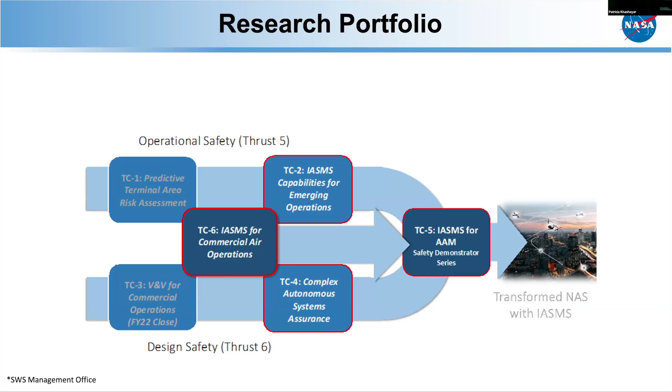TC6 is the commercial operation, but all this work is now going into IASMS. Everyone over the past 4 or 5 years has worked on each of these parts, and the final one is IASMS. AAM stands for Advanced Air Mobility, and that's where everyone is transforming into, the future NAS work.

As a project, there are a few things we look into: improving efficiency of the flight, how you access the vehicle itself or the airspace, how you expand the services, and exploring, discovering and understanding the impact of safety, because safety is the biggest concern since we have humans on board. Anything connected to safety, the vehicle itself or wherever they are in the airspace, whether flying in the NAS or when it touches down.

Develop and demonstrate the solutions, that's what we've been doing. We first started with initial work testing on our own vehicles, but now we're demonstrating it on other vehicles too, which will be part of the NAS. These vehicles, when they fly, are actually flying in a national airspace. Even though they're confined to a very specific airspace, they do have communication with the ATC at some point, so the ATC knows there's a vehicle flying.

So how do you communicate that information to the vehicle, and then identify and proactively mitigate risks, because there are always certain risks which are going to be happening. It may be something related to the weather, the airspace itself, or the vehicle itself, and those are the different risks which may be happening during the operation. So how do you mitigate those, and look into the different target safety levels for that. Our work, especially in the group, is more on the vehicle safety part, wherein we look at each aspect of the vehicle health, and that's what I'll preliminary focus on. But it's not limited to vehicle safety itself, there is a lot of other areas too.

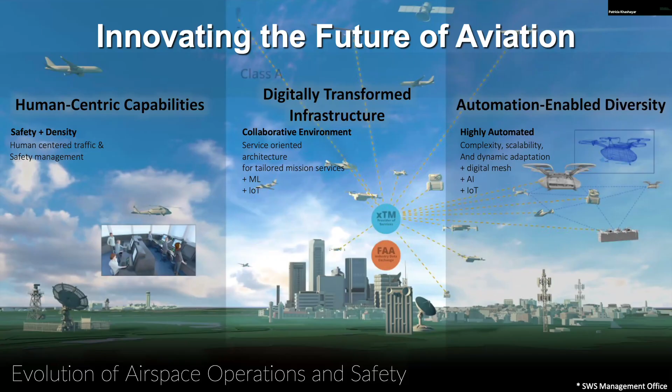The idea is to move towards that direction and minimize the human load as possible, wherever it can be done. And as I mentioned, when we talk about these type of vehicles, it's not just one participant who is there. Probably when we talk about currently in our case, this is general aviation, the single turbocharged aircraft what we have. These are the commercial aircraft. So this is what exactly we would be looking into.

In our case, these are regional air mobility, so we will be somewhere in this area where we are in lower altitude and urban passengers. This is where the advanced air mobility type, the eVTOL type of vehicles would be. But it's not limited to that. We would have some regional jets coming in. There will be higher supersonic and high altitude areas also, which are part of the national airspace. So it's a combined complex effort.

It's not just one specific entity. If I say, oh, I'm just traveling from point A to point B, and I don't care what's happening everywhere else, that's not how it works, we cannot be isolated type of operation. It has to be integrated with some kind of thing, because at some point of time you may have a launch system, so probably you may have to clear out space. There could be a high impact. There are some cases where airspace is blocked out because a specific passenger, president, or high dignitaries are traveling, then they block out the airspace itself. So if something is blocked out here, probably you may have to reroute your vehicle, but then can you reroute at that lower altitude? Those are some of the decisions you have to take during that operational period.

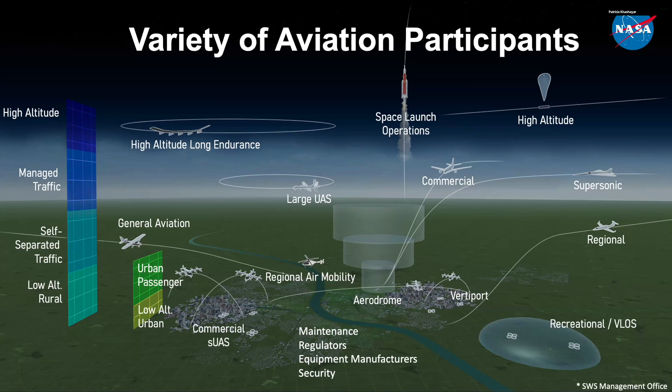So how do you try to look at the eVTOL or the commercial SUAS type of space, which can be automated in some time? What are we trying to look into? More operations, the more operations we have, the more risk we have. Whenever there is a new mission which comes in, that brings in a lot of complexities, because any new thing which has to be integrated will have complexities for the system itself. And how can you sustain under different constraints the way we are going into transforming, like probably electric mobility, which is coming along.

Which is coming along. So how can you make sure that those kinds of electric vehicles are also part of the system, or integrated in the system? And the three things we are looking into are digital transformation, how to change existing systems and integrate them; and AAM, which is how do you certify them? Because these new vehicles are there, but if there are new technologies coming into the system, how do you certify them? So that's a very important thing.

And how do you do automation and autonomy? So you have to automate it, but then how much percentage of that can be autonomous, and how much percentage can be human in the loop? So there are pros and cons to that. So how do you control that part? So we looked at how the system behaves, but then there are a lot of complexities and risks involved in that. And the risks basically depend on different areas.

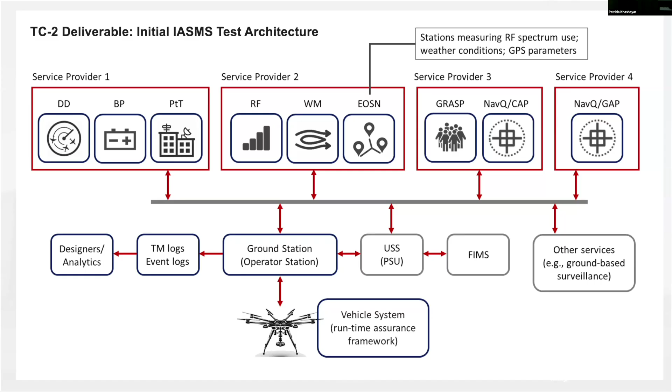So everyone provides different information, but everything is gathered together to give you a specific output for how the total health as well as the system health is going to behave in the future. That's what we try to look into. And these are like software sockets. You develop your own algorithm and connect it to the bus, and the information flows. Once it flows, it is provided to everyone, and you can take whatever information you require for your decision making and take that decision. At the lower end, you can have several operators, not just one vehicle, but multiple vehicles.

I did talk about when you have to take a decision. In the prognostics case, whenever I get to know that something is going to fail in probably 1 hour, human intervention is a good way to do it, because humans can think about it and take a decision. But if something is going to fail at a millisecond or second level or a couple of minutes, human intervention would not be appropriate. In that case, autonomy would be a better way to take over.

But in the case of a couple of minutes to a couple of hours, it could be pilots and air traffic control. And anything beyond that is probably maintenance. So if I think my motors are not behaving properly, or my battery needs to be changed over a period of time, that is a maintenance thing, but my prognostic horizon can give that estimate to me.

So I know that when I'm flying my vehicle, that yes, I know there is something — the battery pack is probably aging or degrading, but I cannot change them right now. I can change them probably in the next 10 flights or in the next 5 flights. So that is the kind of information our algorithms give to the operators, and then they can take decisions based

on that information. So whether it's maintenance or whether it's taking a decision to change the route, which would happen closely, within minutes or 20 minutes. But anything beyond that is called maintenance or predictive maintenance. That's what we call it. So we combine both of this information together, and depending on that, the operator can take the decisions on what has to be done.

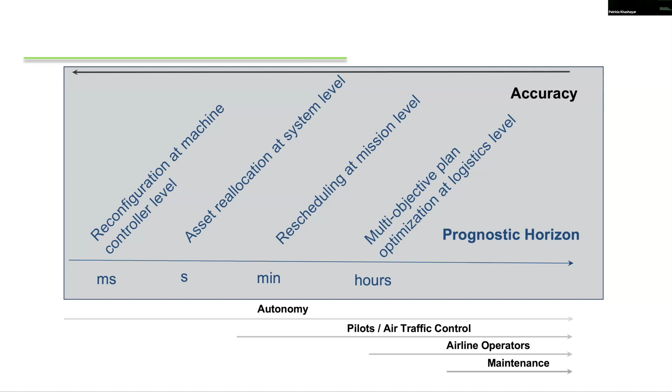I'll go into the basic framework of how these operate. I thought I'd take a story and then go in depth so that you have a good background of what work we are doing and how it integrates with the actual system. So I went the other way around. So this is going in depth now, into how the algorithms operate.

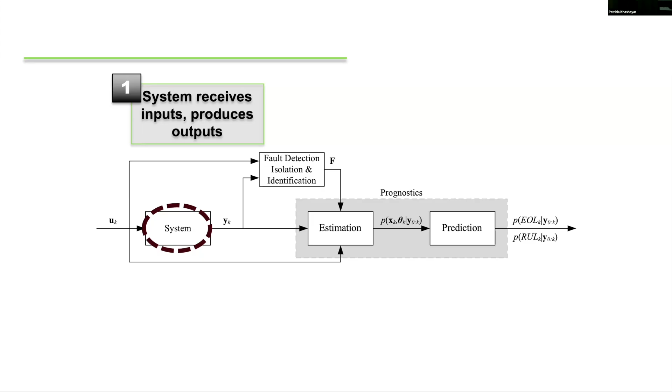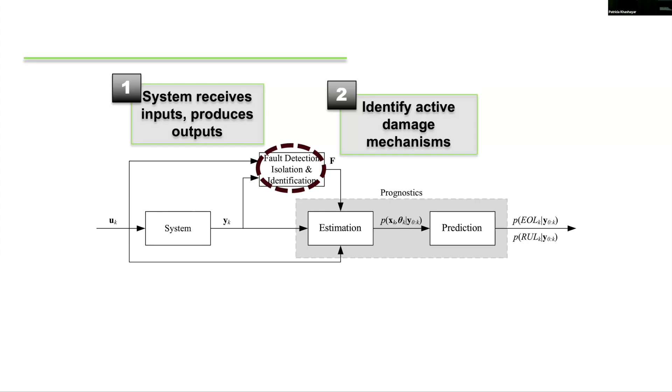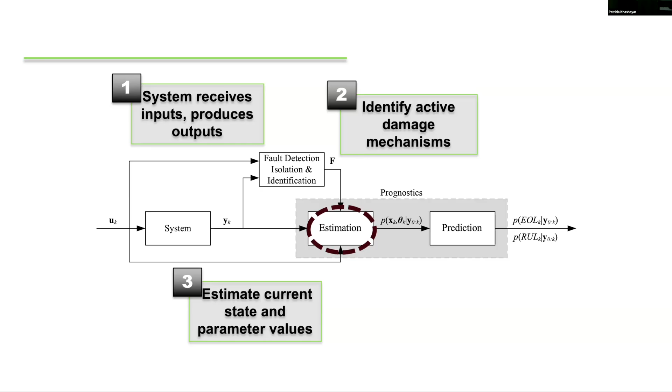Basically, you have a system which receives an input. It could be any system. Once your system deviates from its actual operation, you identify the active damage progression or what damage mechanisms are there. Once it's detected that there's a problem, then we try to estimate the current state and the parameters. So it's basically state estimation: okay, there's a fault, but what's the fault magnitude? What type of fault is it? So we try to detect that. That's fault detection. And then based on that, we try to make a prediction.

So it's very similar to when you go to a doctor. I have a cough, so probably the doctor will diagnose why the cough came. Did you eat something specific, or did you have a cold or anything else? And then the prognosis is, okay, take this medicine, you will get better in 3 days, 5 days.

So systems are exactly that way: you have inputs, something deviates, you try to detect that, and that's the diagnosis part. And then you try to estimate, okay, do I need to take one tablet, or half a tablet, a quarter tablet, whatever that is. You estimate the magnitude, and then you predict that your system will fail in probably 2 hours or 5 hours or 10 hours, whatever that timeline is. So this is the whole process. The whole framework is based on this architecture, and we have been working on this and improving as we go forward.

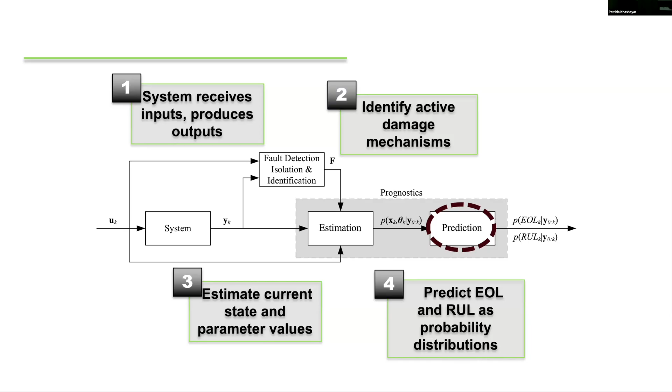And when we have to know about the system, the best way is always to go to first principles, and that's what the group has been looking into. There is a lot of work done on data-driven methods and on machine learning, and we are catching up with that part, where we are trying to combine machine learning approaches, and I'll talk about that. But the underlying thing we are looking into is the underlying physics of those systems and subsystems, and modeling those. So we try to model the damage progression, what's happening.

So if something is breaking, if you take a motor, the motor has windings, it has rotors. So what is the problem? Where is the problem? You look into the damage propagation mechanisms and determine the threshold. Each system is different, so they will have different threshold values. If I take a battery, probably the state of charge determines the threshold. If I take a motor, probably the internal resistance or winding resistance determines the threshold, or probably the RPM speed. We can set those kinds of things. So everyone has different threshold values.

And once you determine those thresholds, then you develop algorithms which will propagate them forward. Because my system is moving forward, I know what my current state of health is, but now what I have to do is use that model, estimate my current health state, and predict what's going to happen in the next 1 hour, or in the next 15 days. So that is where the model comes into the picture.

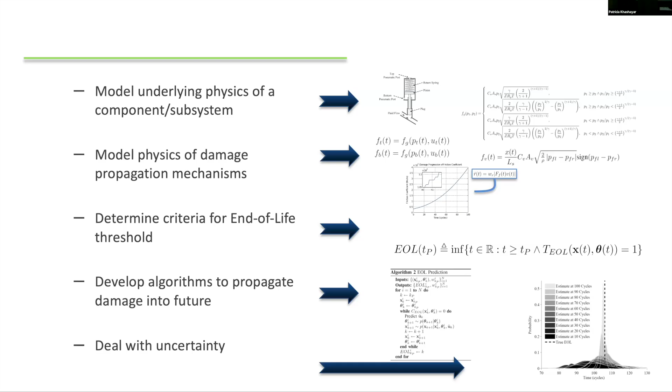But if a model is good and if I say, okay, 2 hours plus or minus 5 minutes, yes, that's better information because then I have confidence that whatever estimates I'm giving in the future are good enough. So that all depends on how good your model is. It can be anything. It can be a first principles model, can be a differential model, depending on what you develop around it.

So as I was talking, we looked into the physics part of the model. For a long time we looked into the physics parts, developing differential equations. So we looked into models for batteries. We looked into how rotors are behaving or what the wind thrusts are. We looked into a lot of structural modeling. So we do a lot of SHM, structural health monitoring.

So some of the work we have done is on composites, wherein we can determine what the fatigue crack growth is. So everyone must be aware of the Paris growth model. Like, okay, you have a crack, but now based on that crack, how will it propagate forward? And then can I determine when it's going to fail? So that's used for bridges, steel, metals. But then we tried to work on composites. So that was some of the work we have done.

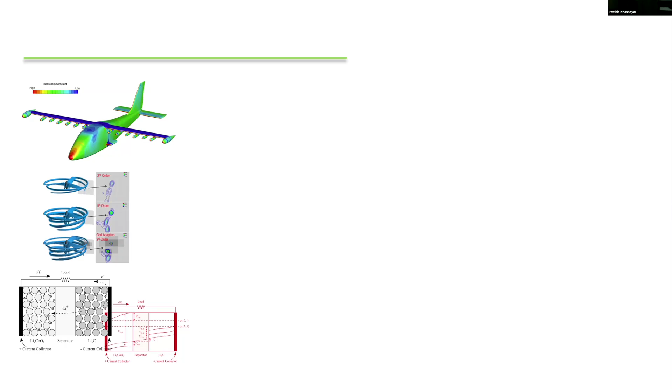But now the other side of it is there is a lot of work done on machine learning. So you have a lot of data available because IoT is coming up and you just keep on collecting data, so you can develop a lot of machine learning models. But at times, the data you get is always constrained to a very nominal operation because failure operations are very rare.

So if you operate the system for like 10,000 hours, probably you may get not even half an hour of failure data out of it because most of the time it's operating normally. Only some abnormalities are captured, and that is difficult. So you need to have very good data if you want to build good models, especially for complex systems.

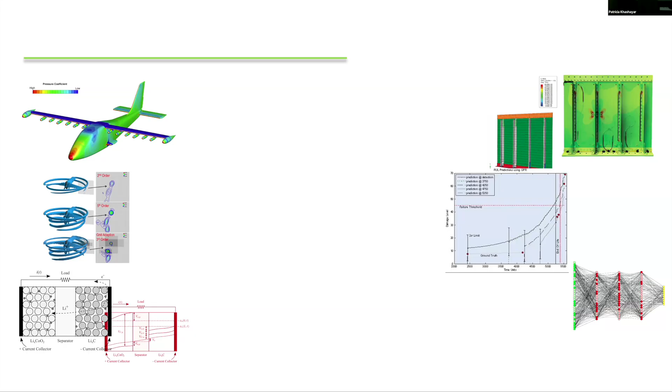So what we came up with was a method where we could combine the two of them. So we combined the physics part and the data-driven part, and we came up with this new methodology, which is very much coming up now, called the physics-informed neural net. So it's basically trying to learn some of the parameters, keeping your physics model consistent, but using the data to update your models. And you try to check what the degradation models were.

So in the previous slide, we looked at how to learn the degradation models or specify what the degradation models are. So we try to use this physics-informed neural net approach wherein we could combine the two together. And there is PyTorch, there is TensorFlow, these new Python packages available. So this is new work we developed wherein we combine the two and apply it to a few examples. So I'll just talk about those.

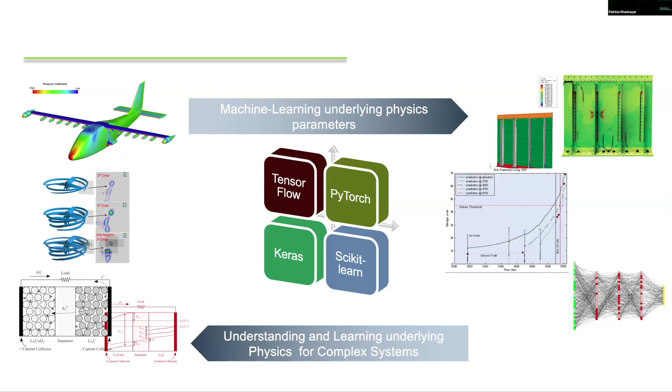So this was the earlier part, and I'll just go a step into diagnostics, how we do it. So for the diagnostics part, which we talked about in the architecture, what we did was we looked into the FMEA part. FMEA is basically looking into the root cause analysis. That root cause analysis was applied to a UAV type of vehicle again, because that's some of the work we have been doing. But then everyone has their own root cause, right? If you have an avionics system, that would have failed differently.

The structures may fail differently, the actuators may fail differently, and the powertrain itself may fail in a different way. So we looked at all those different root causes and how that would affect the vehicles, because these are all part of the vehicle. So each one has a different root cause, and we looked into that.

We implemented a Bayesian architecture. So Bayesian architecture is basically probabilistic detection, wherein we are able to detect a fault in the system. So the root causes are the top lines. The root causes are basically the operational conditions, but the lower ones, what you see, the TB, IB, those are temperature, the current, voltages on each one of the systems. So this was for a power system, and we used one arm of the UAV, and we were trying to look into that.

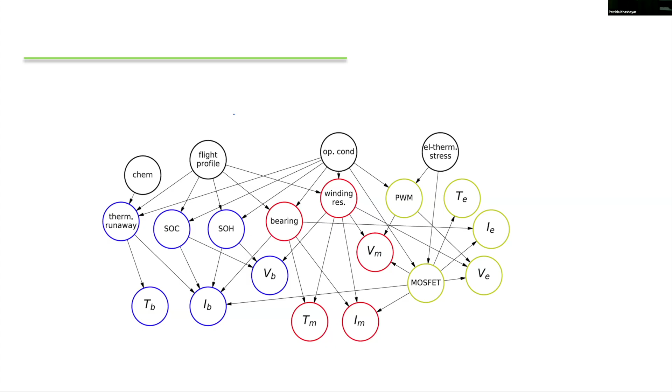The blue ones are all battery faults. So in a power system, you have battery, you have the speed controllers, and the motor. So these are the three key components. So we looked at each subsystem, and then based on what we observed on the sensors, we were trying to do a Bayesian analysis and then say, okay, which fault it is? Is it a fault in a battery? Is it a fault in the motor, or is it a fault in one of the speed controllers?

So we just did a basic study, or at least an example, wherein we're trying to compute what are the conditional probabilities. So if VB, voltage from the battery, voltage from the speed controller, and voltage from the motor is high, that means there is a fault on all three of that. So the underlying Bayesian framework is able to detect that, okay, yes, there could be a fault in either one of these. So then it ranks it based on what is maybe the highest probable cause.

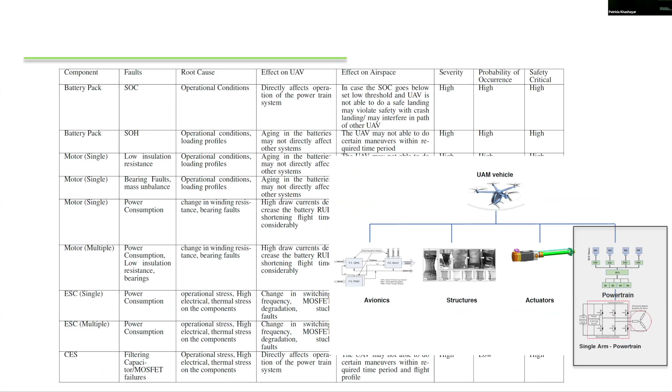And how is that done? So the probability distributions are based on the FMEA model, what we looked at. So we define the probability of causes based on the distribution, based on what will be the cause of these faults, and then applied that distribution to the whole network. And then based on that, it's able to rank it and then say, okay, yes, you see the fault in all three sensors, but the actual fault is the battery fault. That's the reason SOC has the highest probability, so that's the one at the top. That's because the state of charge of the battery is going low, because you are operating the battery, and that's the reason you see the voltage going down.

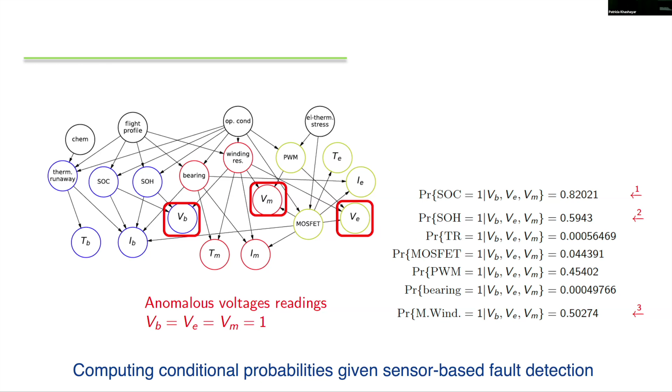So once you detect that fault, now you know that, okay, this is the fault. And then you apply the prognostics to it: I know that the SOC is decreasing. Now how much time do I have before this SOC reaches the specific threshold? So then the prognostic step starts. You detect the fault, and then you have prognostics, wherein you try to estimate, now I know that the state of charge is the one which is changing, how much time do I have before it reaches the threshold down the line?

And here we use the physics informed neural net framework, what we talked about. So we have the system input. This is the same architecture we showed earlier, but now we have a physics informed recurrent neural net, which has both the system model, the physics model, as well as a data-driven model. And then that is updating at each step. And at the lower point, this is the differential equation. This is the purely differential equation model, called the electrochemistry model for the battery, which we developed in the lab with a few of my colleagues a couple of years back.

But the unknown parameters in this case are the internal resistance of the battery and the capacity of the battery. So those are the two parameters which keep on changing over the period of time. So the model in our case looks at the input current. What is my input current? And then based on the whole model, it's able to estimate what these R and Q max values are over the period of time, and then those will change. So the rest of the model is a purely physics model, but only these two parameters are learned using a multi-layer architecture of the neural net. So the neural net only learns these two parameters which keep on changing.

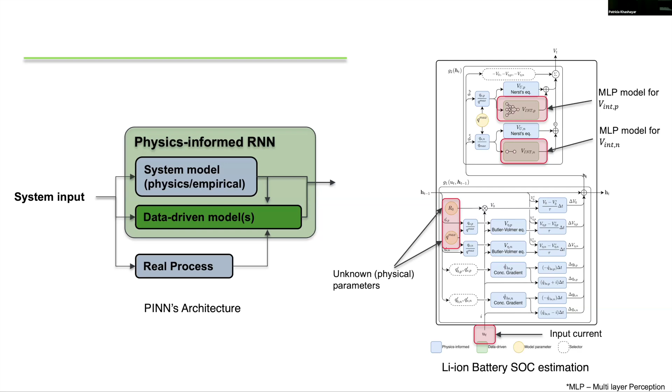And we demonstrate that through some of the work we did in the lab.

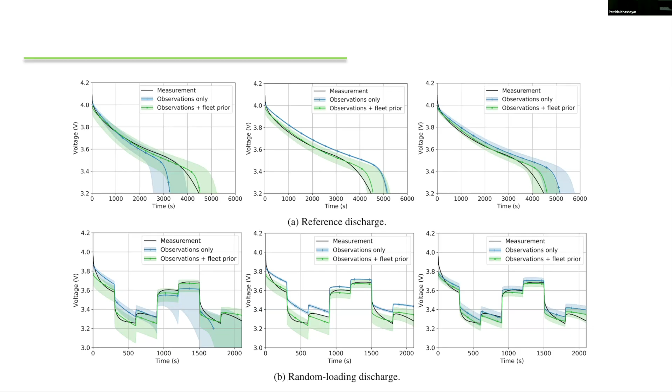And we have demonstrated this on small vehicles a lot. We almost did 100 flights, demonstrated that both on fixed wing vehicles and rotorcraft. And the work continues, we are still working on it and improving our algorithms.

But looking ahead, what we're trying to do is not just apply it to a single vehicle. So I showed an example for the batteries because that's my core area of work, what I've been doing. But I've also been working on other areas, like the powertrain of the system, and how can you apply that to weather?

Can you predict the weather well in advance? Because these vehicles fly at lower altitude, so the weather is very changing. It's not like the weather at 30,000 feet, but at 10,000 feet, it gets affected locally also. So can we use some kind of physics-informed neural net approach to make predictions?

So there are a couple of my colleagues working on the weather prediction part. If there's something on the vehicle performance, can you change the vehicle's limited performance? Can you improve the performance of the vehicle at least to make that trip, or to make sure that you're confident the vehicle will make it?

Any traffic collisions - if something happens, if there's an issue, can you change the path? Because if the path changes, there are other vehicles also moving around. So can you determine that, or exchange that information on the bus with other vehicles, so that your change in path doesn't affect them? Because at this point you thought, oh, the vehicle has some issues, I need to change my path. So if you go in some other direction, other vehicles may be coming in and they may have some emergency. So how do you exchange that information and come up with a better estimate for trajectory planning? That's the additional work we're also looking into.

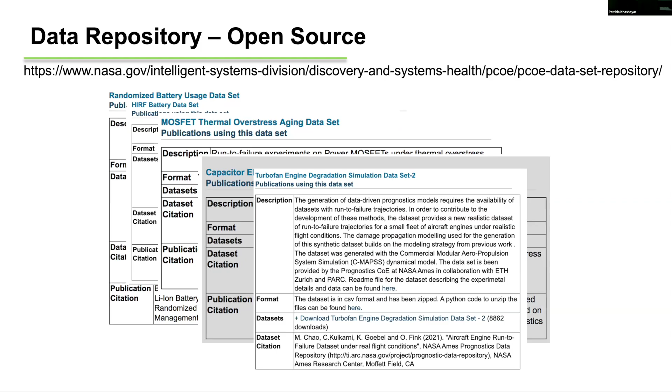So there's a turbofan engine - we worked on turbofans also for the jet engine. We had a big simulation for that, and we've open sourced that data set also. So it's a good way for us to share that information with the rest of the research community.